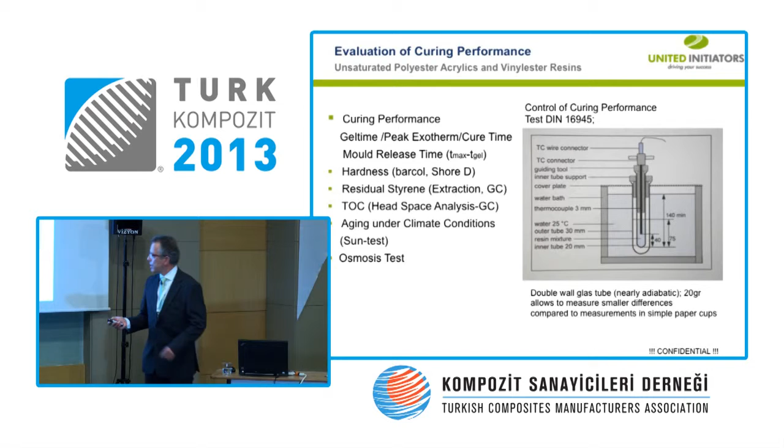It was clear that phthalates will disappear. They are not allowed to be on the market again. There's an existing list called SVHC from Helsinki, substances of very high concern. So we decided to set up only phthalate-free MEKPs.

After the evaluation and the dossiers for REACH, the European regulation for chemicals, it was found out that you can still use DMP. So the Swedish plant brought all DMP peroxides with them. So we now have two lines: one phthalate-free, one based on dimethyl phthalate.

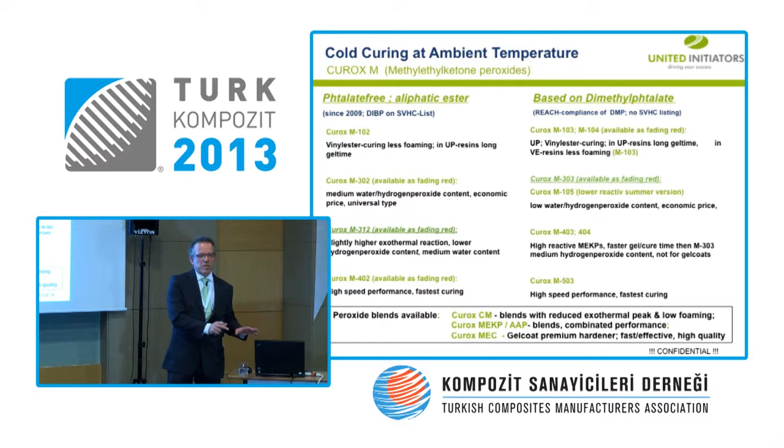Then we have the MEC - this is a gel coat premium type. It's more expensive than the others because it's based on a special synthesis. It's not a simple MEKP, it's something modified. But with this one, you get a faster cure, harder surface, lower tackiness, and absolutely reduced porosity. Today it's a smaller product, but we hope it will grow in the future.

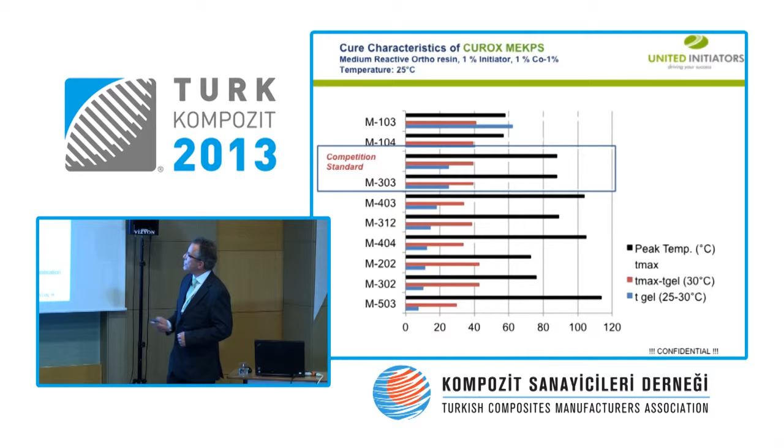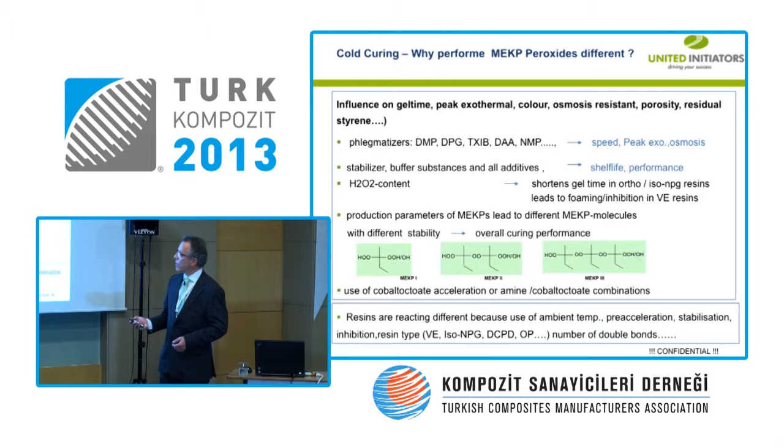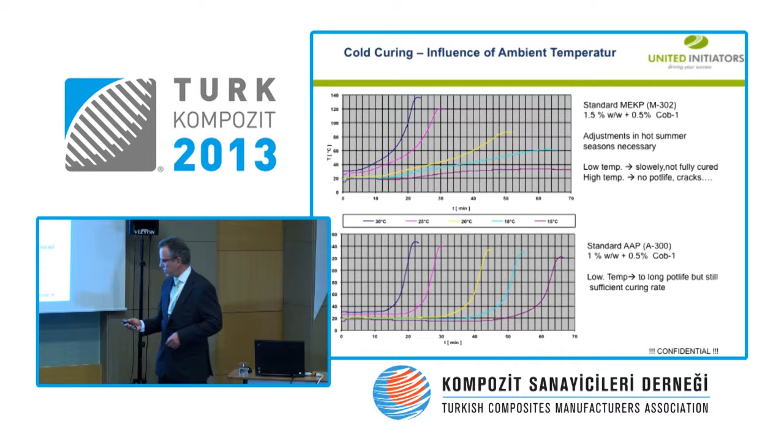Then you see AAP is much more stronger, it doesn't lose so much enthalpy, it remains the peak, but the gel time is getting very long. Here's such an adjustment: you see 25 degrees M303, 25 degrees 105, and if the temperature increases, you come closer to the 303. This is a possibility to handle such things.

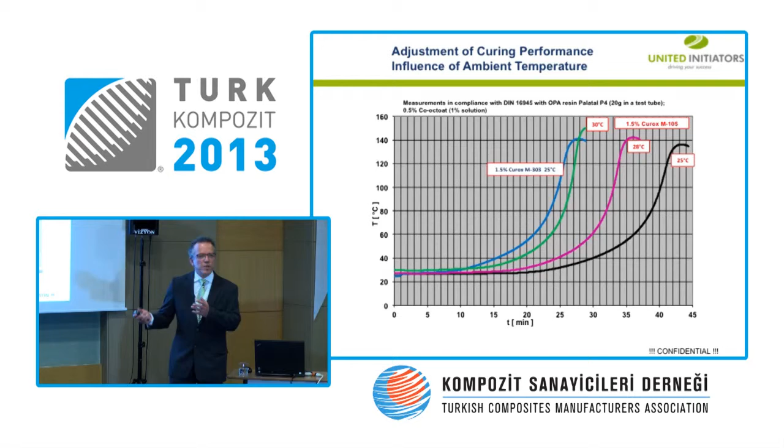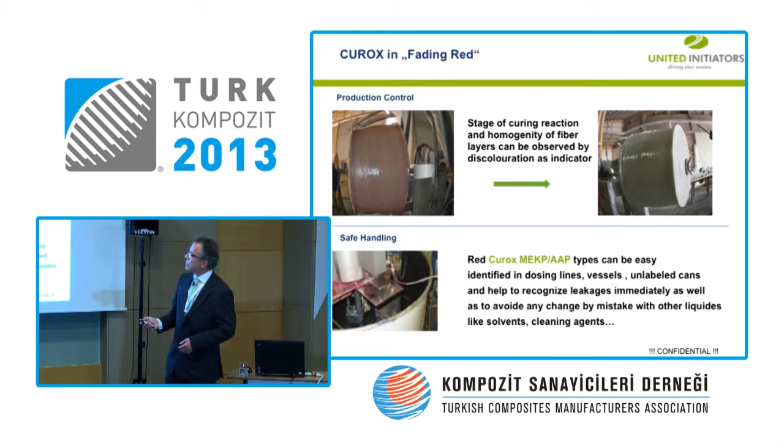Now, just a short view on the gel coat hand spray layup application. Very much standard is the M303-312 - one is phthalate-free, one is with dimethyl phthalate. The MEC as a premium hardener, 102, 103 for the vinyl ester gel coats.

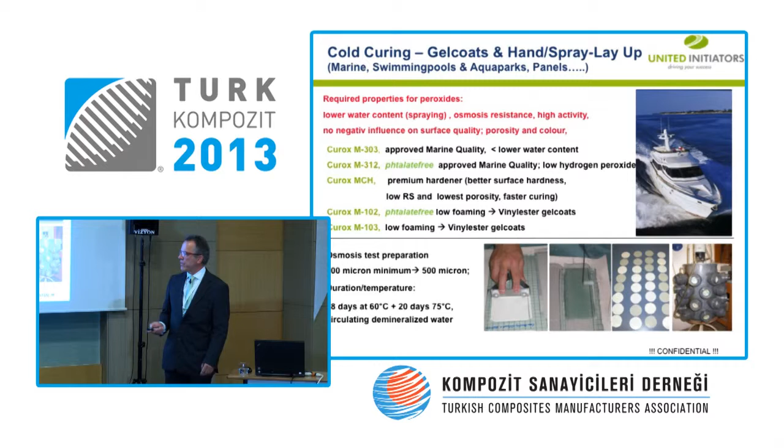And how we do such an osmosis test - maybe you also sometimes do something like that. I just want to show how we do it. We pull a film with 700 microns, then the styrene comes out slowly, the film is losing thickness, coming down to 500 micron, then we make the lamination. You have to wait minimum 45 minutes, and then we cut out the pieces, put it to a tank at 60 degrees, 28 days, and additionally 20 days at 75 degrees, circulating demineralized water.

And just some examples - so there's one slide missing. Okay, there is one slide hidden, unfortunately.

Then I explain it like that: if you get water to the fiber, it starts to swell, and the blistering begins. This can happen if you have porosity, or a thin layer of gel coat, too thin, or a wrong gel coat - that means not suitable, not elastic enough, you get cracks, and the water can go to the fiber.

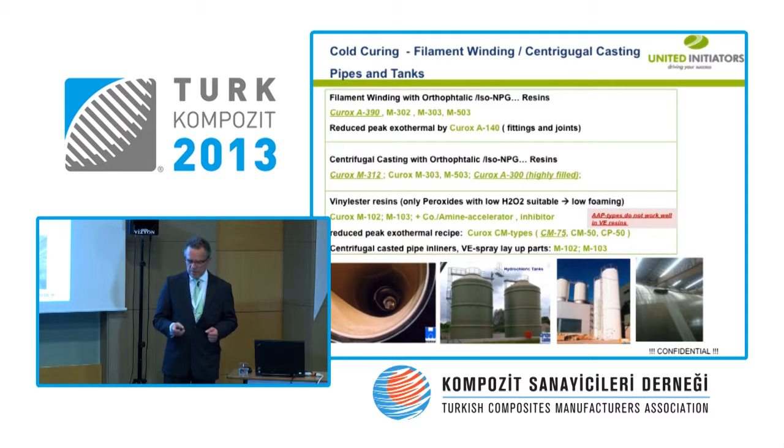A390, I expect, let me check, I think the switch, the error message killed some of my sheets. Yeah. Check that one. Yeah. Okay. Okay, I continue.

The AAP has existing different modifications. The A300 is the standard, but for filament winding you need possibly a little bit stronger reaction.

So here you see the A390. There's a slightly increased peak. There is a perester inside. This is reacting, after the AAP comes the perester and gives another higher peak.

More of that you can have with the A335. You have another step here. This is how to improve the performance of the AAP.

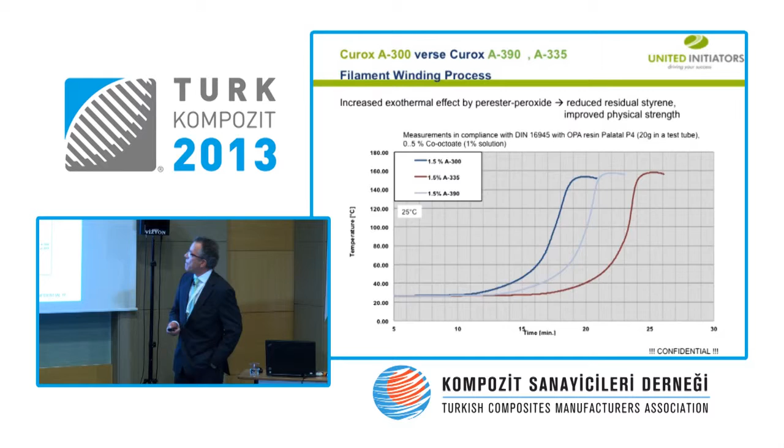If you use temperature like 40 degrees, some of the filament winding companies have infrared equipment to heat up a section, then it's a little bit different. The standard AAP is slower than the A390.

So the A390 is sold in big amounts to this industry to improve physical strength, and finally also the residual styrene.

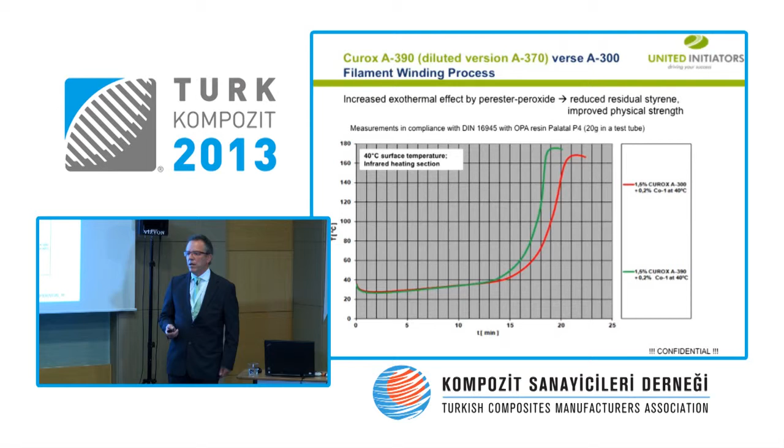This example shows if you have really thick parts, like this kind of fitting, or this is a socket from an antenna, the raw produced parts, and you have maybe 5 centimeters or 10 centimeters, you can easily adjust the exothermal using A140.

It gives you a really smooth reaction. The peak is not very big, and the curing is already very good and finished. You see that below this peak is a lot of energy, so it's curing smoothly over time.

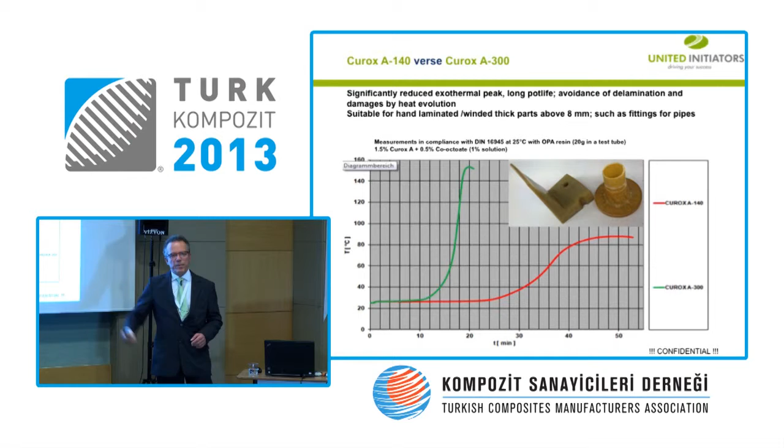Here you have a few, again on the different A300 standard. By the way, A300 we don't recommend for gel coats, because due to the production it always contains a lot of water. I think there is no quality on the market which has lower than 6-7% water.

It also reacts with cobalt a little bit different. The color reaction with cobalt is stronger, so you may not have a white gel coat, but it can appear a little bit greenish. So the AAP is definitely not recommended in the marine area.

We heard before RTM, possibly if it's colored, so it may be possible. A140 we already explained, 335 also, 390 also.

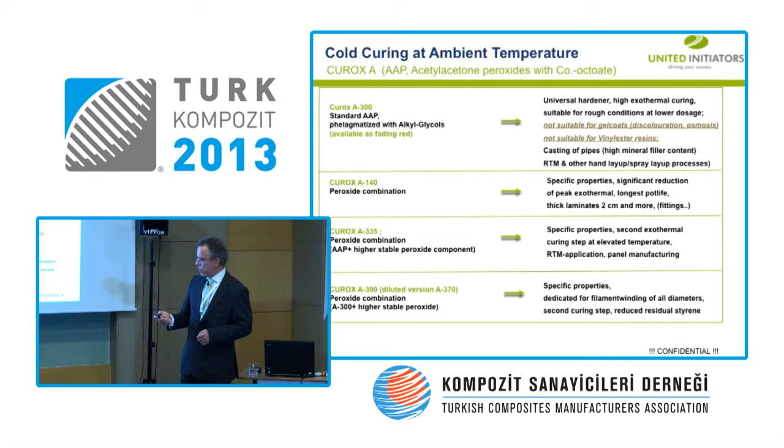Now coming to the RTM, what we found on the market is a blend. Of course A300, yes, AAP here, very strong peak. The M312 is a little bit earlier reacting, giving a lower peak.

So we advise to use a blend of both, and certain customers use this blend, because then you don't get the steep reaction - a smooth reaction starting earlier - and you have nearly the same mold release time as with AAP, but not the stress in the material.

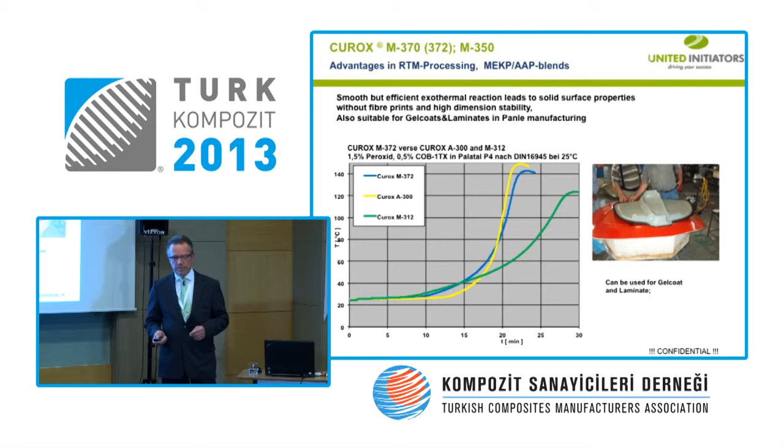The others are affecting the exothermal peak and bring it down. Very common is CM75. It can be used also in infusion, and it's more or less the working horse in this field. The others are specialties.

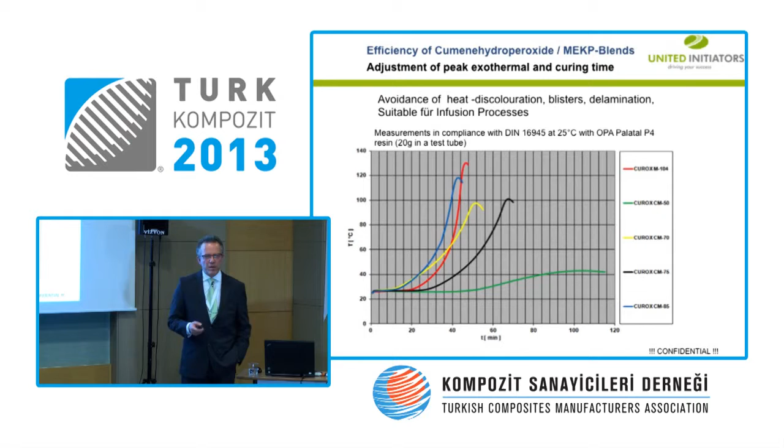But coming to the curing performance as such, if you compare in a DCPD resin 2% standard MEKP with 2% CM75, the first 4 hours the residual styrene is quite high. But after 24 hours it reaches the same limit, because the cumene hydroperoxide is polymerizing more and more.

A 12 millimeter laminate, which is normally not suitable for 303. I think there is some problem with this laminate, quite hot.

You see here that you have from the beginning better values with the CM75, and the dosage is of course much lower.

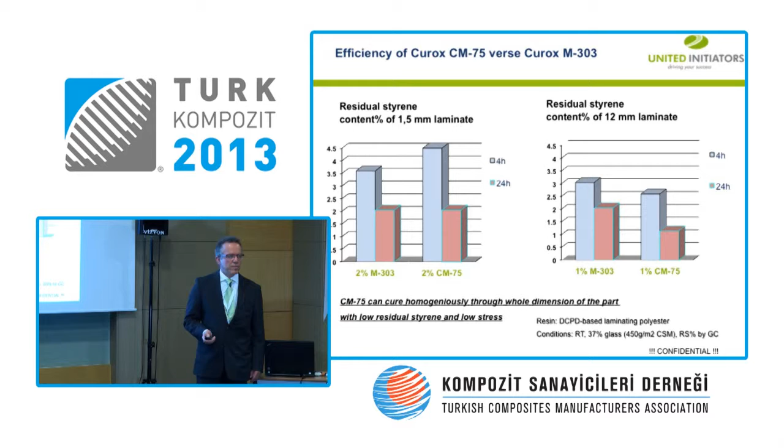If you have a resin, then you have to decide if it's foaming or not. So what can I do? Then you should just look in the portfolio of what you can get from the supplier, and you will find out that the foaming is different.

The upper row may be acceptable, the lower row is definitely not so acceptable. The oxygen inhibits the reaction, makes the surface tacky, and you see here 102 is the most reliable. CM50 contains less MEKP, also reliable, and both may sufficiently cure, and you can handle this kind of oxygen formation.

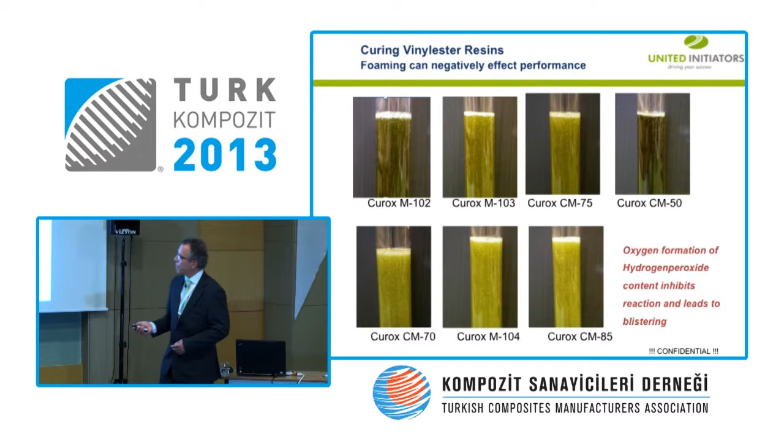Now we came to the next kind of products. We have here the BPO, just to mention. BPO is very well known for car putty and doing things by hand. Some of them even use it in pultrusion, I heard, but I don't know the end result.

Definitely BPO is a standard for simple work. The residual styrene is always a little bit higher, reaching maybe 3-4%, which is not high-class performance. So we find it in road marking, floor coating mainly based on acrylic resins, but also in chemical anchors and mine bolts. It's accelerated only with amines, not with cobalt.

These are the different supply versions: liquid suspension, sprayable, and powder forms. The benefit of this product is if you have 5, 6, 7 degrees cold flooring or cold mold, it will start and react. This is a difference to the MEKP AAP - it can be used at lower conditions.

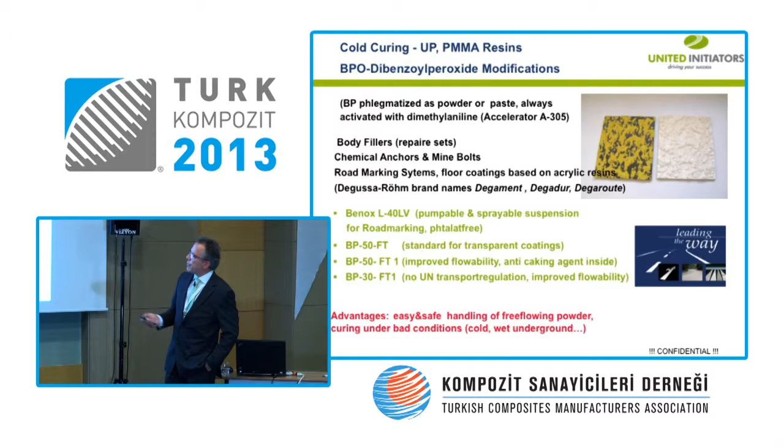Now the panel manufacturing, also meanwhile very much standard here. The I300 methyl isobutyl ketone peroxide is the all-over standard in this industry for continuous laminating, starting with 40 degrees to 80 degrees on a continuous line, maybe 60 meters long, whatever. Also in Turkey, I know some of them who are doing that, mainly one big one. And these are also pictures from our customers - I'm allowed to show that.

Yes, the requirements are you need a long pot life because you have a resin bath, and from this resin bath you dose, and you cannot always change fast the resin bath. So you need 2 hours, 3 hours pot life, and the MIKP is much slower than an M102.

There is another process, table process. They use the same blend I showed with RTM, M370, MEKP, AAP, and for corrugated sheets I think you don't need the MIKP. These are smaller plants, not so long curing, so you can use a standard MEKP as well.

Also important is the climate resistance, of course, and the discoloration in the sun test and all these things. The residual styrene should not be below 1% in this case, because this kind of customer wants to coil the product, and if it's 100% cured it's very stiff and you cannot coil it sufficiently.

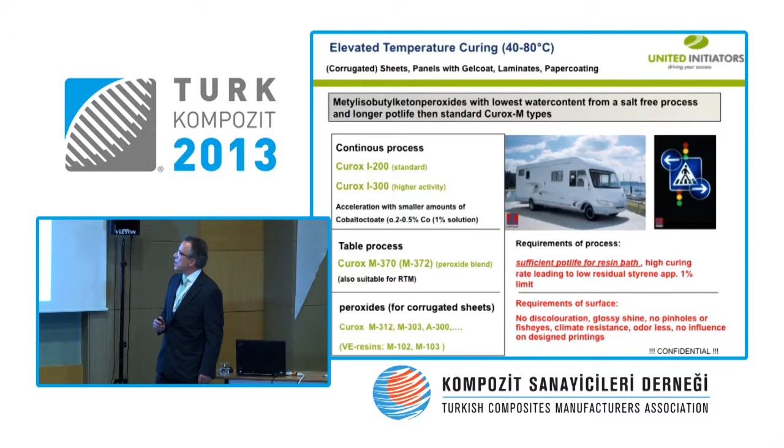Now here you see the reaction at 40 degrees without cobalt, then 40 degrees with cobalt - a big jump - 60 degrees with cobalt, and 80 degrees without cobalt. So you see there is a lot of adjustment possible, and you can adjust it to your process.

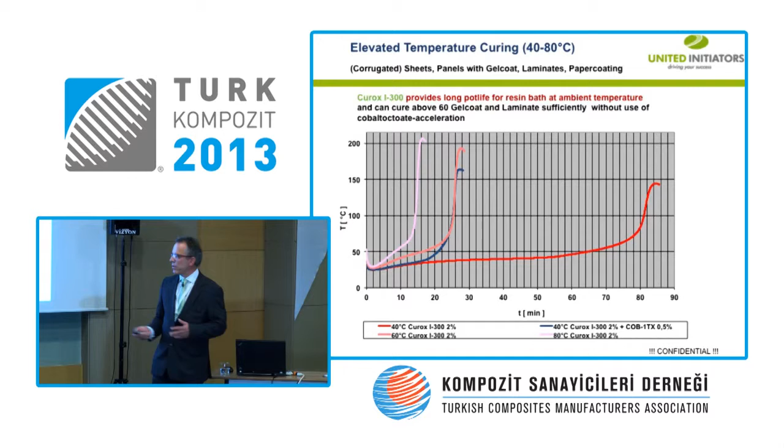Now coming to the next peroxide group for elevated temperature curing. This blend is mainly used for elevated temperatures. You get 2 peaks - BCHPC is a peroxydicarbonate, it has nothing to do with the ketone peroxides. It's a powder, and it must be transported temperature controlled, and stored and transported controlled.

This is the first peak, and then comes the per-ester, the TBPB. This is a heating rate in the DSC, so we spread the peaks in this measurement. In practice it's more a flat curve. But all these applications need a second oven step, or curing oven step, to decompose the peroxide completely.

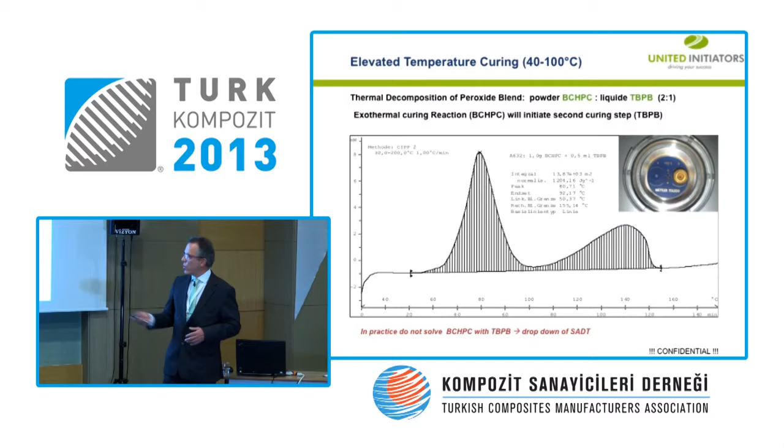This is one of these applications. I don't know how far it is in Turkey. In Europe this company is called Insituform Nordi Tube. They repair damaged wastewater tubes in industrial areas, and they pull in a fiber socket which is impregnated with resin and peroxide, and you have this problem of the BCHPC.

You must transport it at 5 degrees around to avoid any pre-curing on the truck, because this could be 30 tons or something, big inliners. So you can add some inhibitor to protect it from pre-curing. On the place, you bring it into the ground, and then you purge hot water inside, and this will start your curing with the BCHPC, and after 4 to 6 hours it's cured by the TBPB. So you have this kind of 2-step reaction.

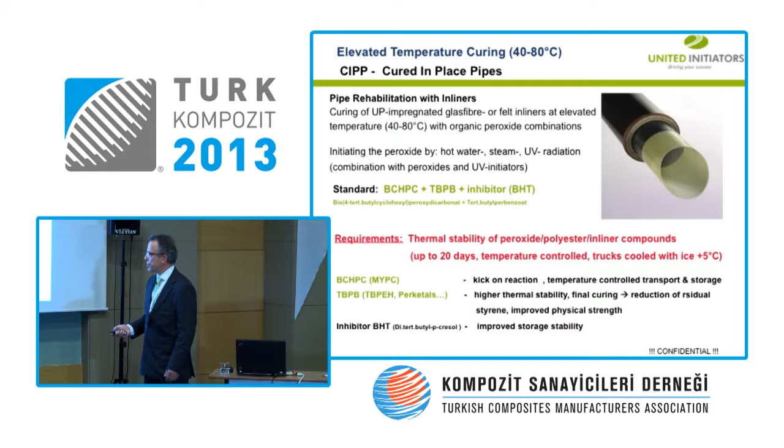Pultrusion is exactly the same recipe. They also use the combination, this industrial standard peroxide dicarbonate plus per-ester. It's a different process, but the peroxide recipe is nearly the same. They need high reactivity in the die, and later on a post-curing step.

Alternatively, there are some others you can use as replacement, or if you need a second step, or you want to have not sensitivity against fillers and pigments, then you can use a perketal. So there are certain possibilities around the standard.

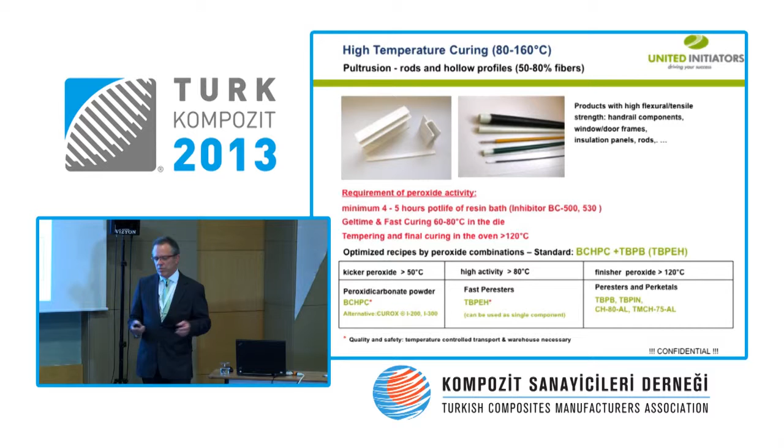Just to mention shortly, injection of methyl methacrylate using similar recipes. You have a vessel with filler and methacrylate color pigments. You inject it in the mold, and then you get a nice part. The BCHPC is definitely suitable for methyl methacrylate resins.

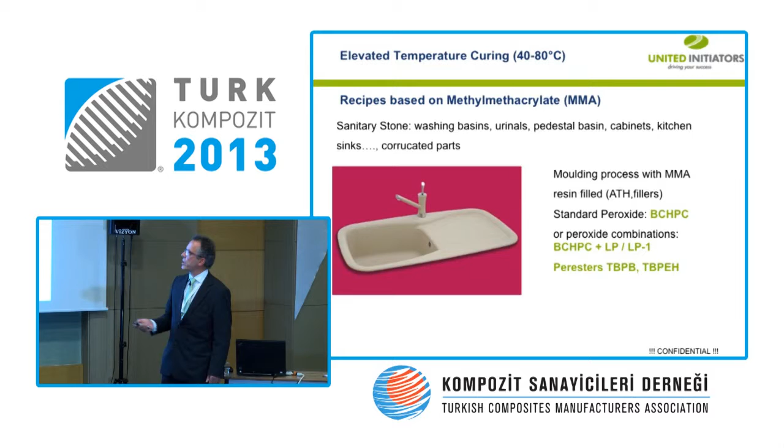Coming to Breton technology, they are using only this per-ester. It's only 7% of resin inside. They need a strong reaction but a long pot life because they have to mix all these minerals and glass flakes in a big container, bring it to the mold, and then the TBPB starts to react in the mold at maybe 100 degrees, 30 minutes. So these are the standards. You can add some cobalt to accelerate - TBPB is accelerable by cobalt.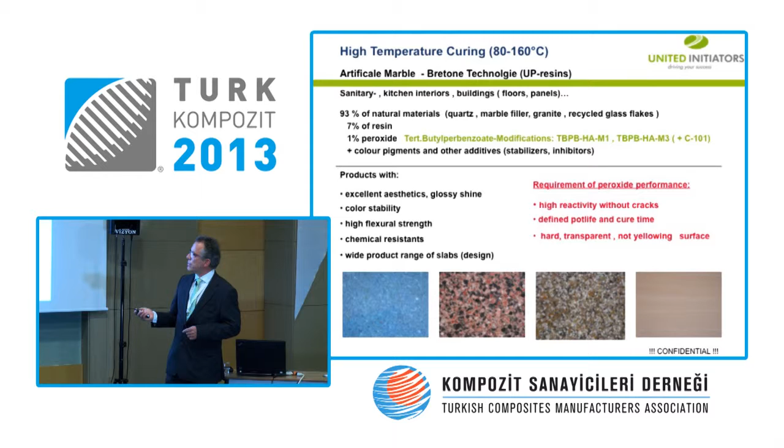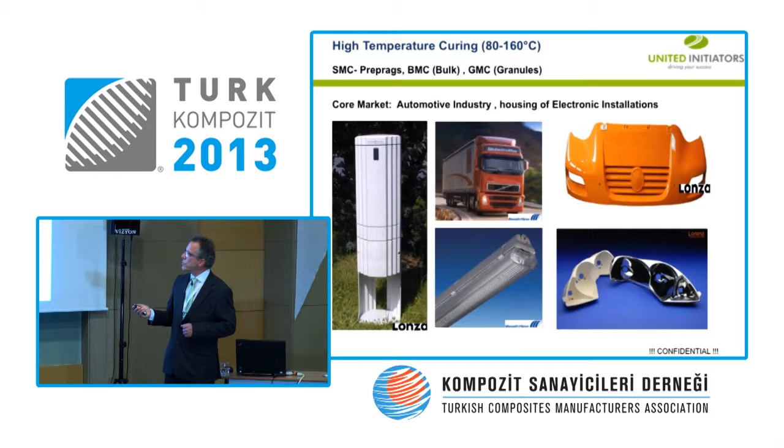Now coming to the SMC, BMC, this is one of our core industries for the per-esters. We are market leader in this field for peroxides. You know all these products. The first one is automotive parts. The second one is electrical installation, cabins, whatever. Or then BMC products like headlights or cabins for neon lamps.

So here you see the applications and which peroxide we chose. We don't choose ketone peroxides. We don't choose peroxide dicarbonates. We chose between perketals and per-esters. The perketals are definitely not so sensitive against fillers, pigments, carbon black, and so they give a certain safety for the pre-preg in transport or warehousing. The efficiency is not degrading over time. The perketals are not so sensitive. TBPB is the widely used standard, but it has a problem with carbon black.

And the TBPEH here is added as an accelerating component. It decomposes faster and can be mixed with TBPB or mixed with perketal, getting a fast kickoff. It depends on your flow time, mold release time, what you want to have. By the way, we have here TMCH-HA-M1. This is already mixed with per-ester and perketal. And I'll show you later a picture of what is possible with this product.

And the TBPEHC is now, at the moment, the standard in the automotive industry for low emission for internal parts. It's a monoperoxycarbonate, different from the others, mainly used for low emission products.

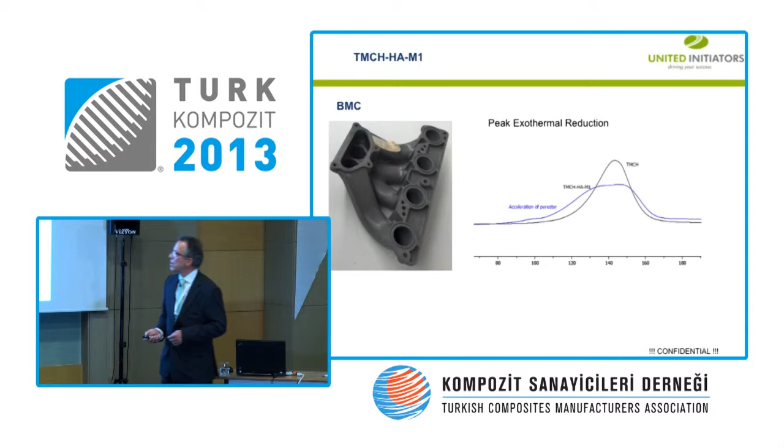This is the overview over the whole range. Fastest one, TBPEH, the kicker. Latest one, TBPB, between the perketals. So also here, possibilities to adjust your performance.

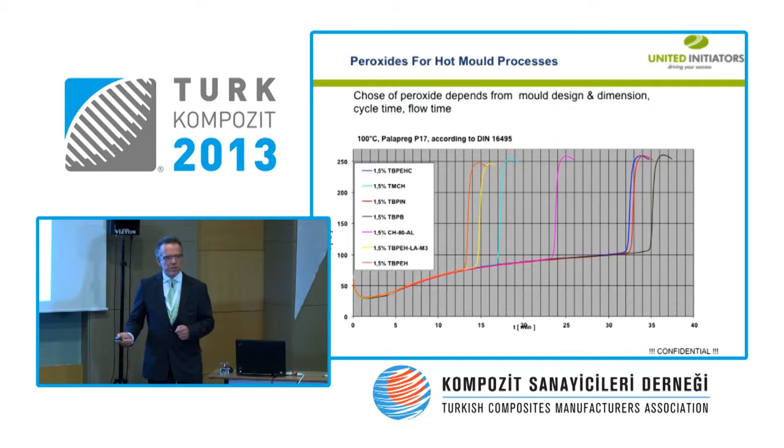Then coming finally to emission. The SMC customers always require low emission because internal parts of cars, the fogging of headlights can result in blind glasses. This is from longer time ago - old cars sometimes have a little bit of fog. This comes from the SMC. So they are still working out recipes with low emission. You see here the volatiles, acetone, epoxystyrene. The headspace analyzer - there is an oven, you heat it, and the gases are analyzed by gas chromatograph, and you get out all these emittents here.

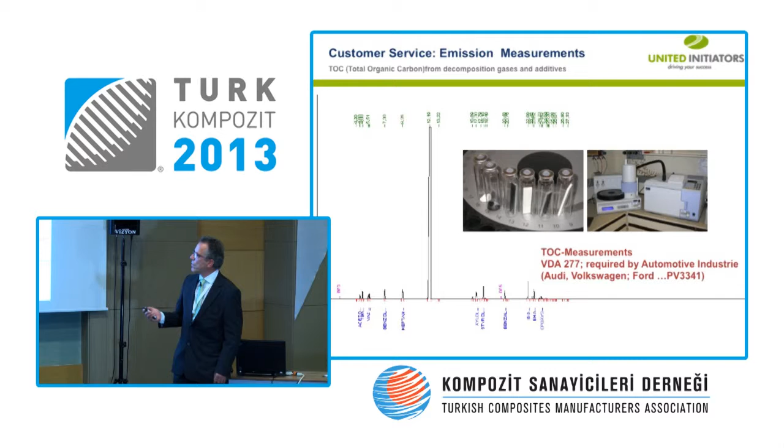The norm is VDA 277. Now, with the peroxide part, I'm through, roughly covering all this kind of applications.

Now coming to safe handling of organic peroxides. Just for people who have a warehouse or a stock in their plant, mainly important is this area, the so-called SADT. This is the self-accelerating decomposition temperature.

When you have, in summertime, outside 60 degrees, and you are using TBPEH, the per-ester, even the empty can, which you put outside of the plant, can give you a problem because the rest of the peroxide, the 200 milliliters, can burst the can and can even create a fire. So always keep your eyes open that the warehouse, the stock, and the waste doesn't exceed the SADT, the self-accelerating decomposition temperature, which is for TBPEH 40 degrees. The MEKPs have slightly above 50 degrees.

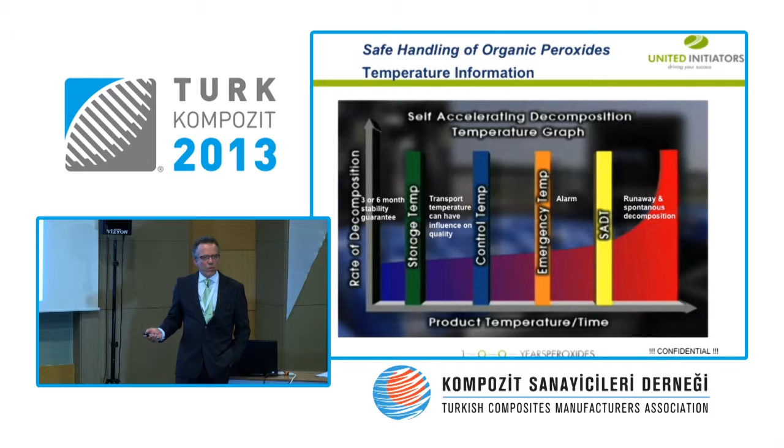What happens if something happens with peroxide? Every manufacturer, others, we had sometimes had an accident in the past. The peroxide decomposes - all peroxides are decomposing into other high flammable components. And this leads definitely even to ethane and isobutane. So you can imagine that you easily can create a second fireball.

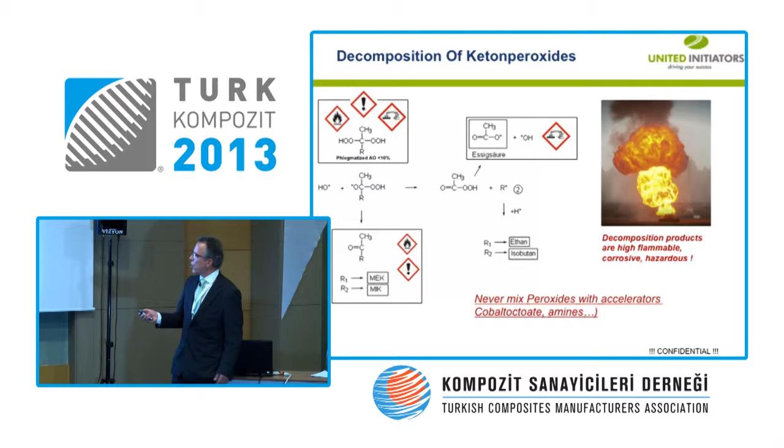This you see on these pictures. This is one pallet of a per-ester decomposing. The warehouse should look like that: sprinkler, pressure release side - if something happens to release the pressure, you have a concrete floor. You have an outside alarm system. And in Germany, we have the BGV-B4, which gives advice, the regulation, on how many you can store at your working place, how many you can store in a separate room in the plant, and if you need an extra building or not.

And last but not least, never store peroxides with other chemicals. Cobalt octoate or something like that is very dangerous. And this is the last advice I have.